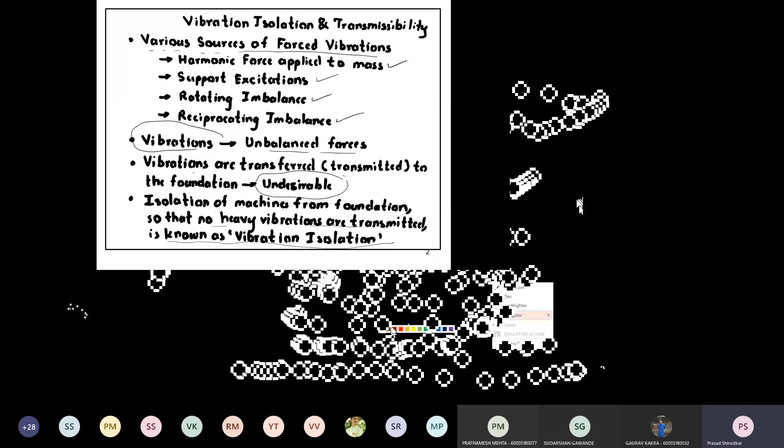Now we will do some mathematical modeling in case of vibration isolation, and this will be a derivative of the section we studied earlier, and here we will be dealing with cases of heavy machinery.

So you have a machine, and it is placed on some foundation. This machine is oscillating due to an external force applied, and the equation for the external applied force is given as F0 sine omega t.

Now the machine is separated from the foundation by means of this structure. This structure is called an isolator.

Now for mathematical modeling, I will create an equivalent model. The same four steps are going to be followed. If I want to create an equivalent model of this system, it will have a mass at the end, that is the mass of the machine.

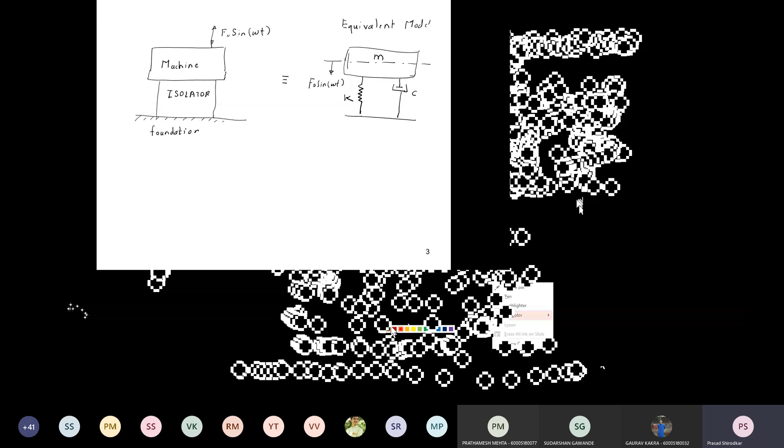To this mass, external force F0 sine omega t is attached, that is mass m, and the isolator provides both properties essential for damping, that is for dissipating energy - spring stiffness K, and some damping properties. So the isolator will have both stiffness and damping.

Now we will draw the equivalent model. So this is basically the mathematical equivalent model. Vibration isolators are placed between the machine and the foundation.

Examples of vibration isolators are rubber, felt, cork, or metallic springs. So these are some examples of isolation.

Now, when we talk about vibration isolation, we also have to define one more term, that is force transmissibility. So we have defined isolation, now we are also going to define force transmissibility. Force transmissibility is defined as a ratio of force transmitted to the foundation to force impressed upon the system.

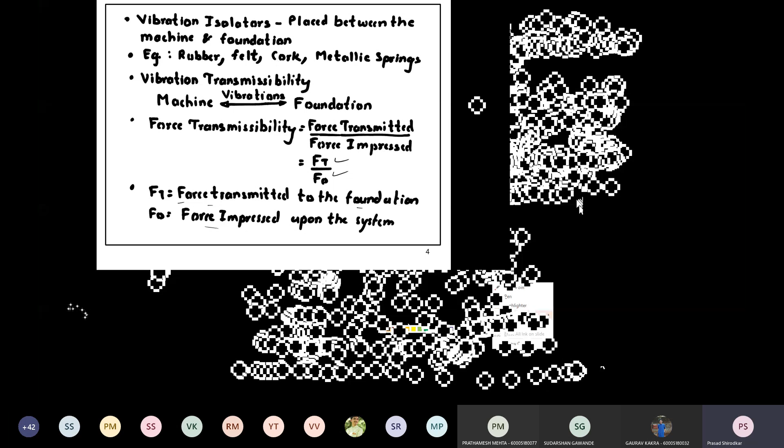So now here we have a machine. To this machine, this external force F0 sine omega t is applied, and if you want to create the equivalent model, you have this F0 sine omega t applied to this mass m, and the isolator will have some stiffness and some damping property.

So the next step after we get this equivalent model is to derive the governing differential equation. To derive the governing differential equation, I'll construct a free body diagram for this mass. This will be mass m, and since the mass is moving down with displacement x, velocity x dot, acceleration x double dot, so you have...

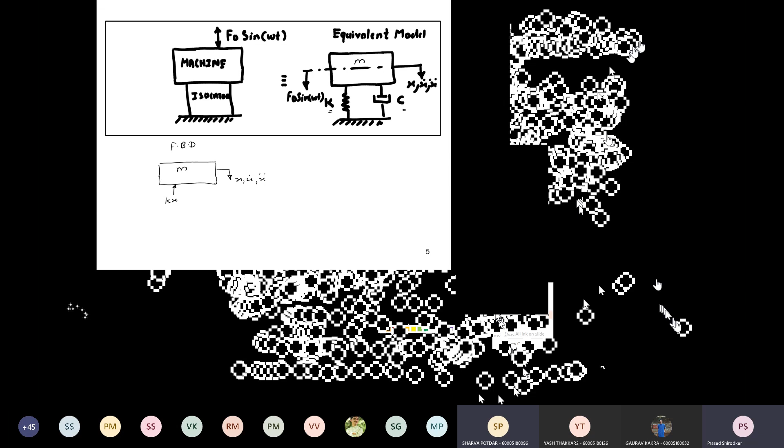Sir, I don't know if it's just me, but the screen isn't fully visible, it's showing different marks of your mouse. Could you reshare the screen? Just a minute. Yes sir, even I am having the same issue. Just a minute. How about now? Yes, fine, completely visible now. Okay, so do I have to recap the things I just described, or can I continue with the slide? Sir, continue, yeah continue.

All right, so construct the free body diagram. The forces are kx, that is the spring force, and damping force cx dot. We have already solved for this kind of system. This is an example of forced vibration, and as I said earlier, this whole topic is a derivative of forced vibration. So the external applied force is F0 sin omega t. For establishing the governing differential equation, I will use D'Alembert's principle. DAP stands for D'Alembert's principle.

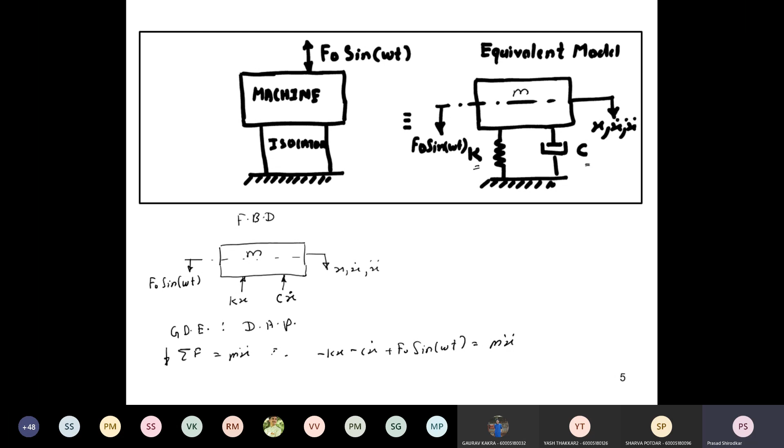So summation F is equal to mx double dot, and downwards is positive, so therefore I get minus kx minus cx dot plus f0 sine omega t equals mx double dot. So this is the equation, or I can rearrange the terms and write it in another form.

mx double dot plus cx dot plus kx is equal to f0 sine omega t. That is our familiar form.

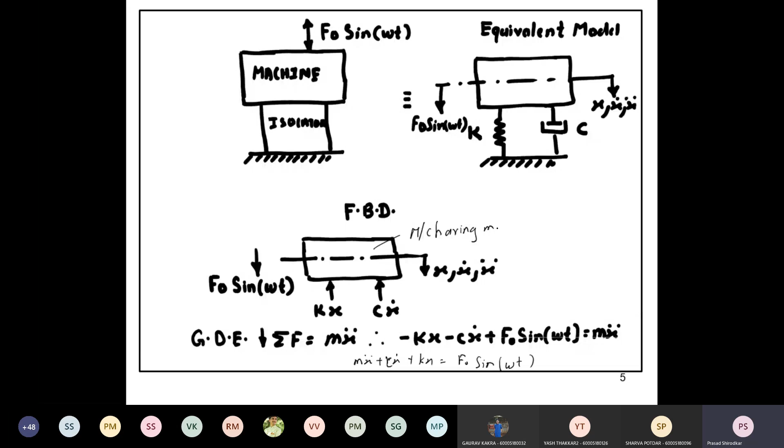So this was the free body diagram for the mass. Now this mass is of this machine, having mass m, and it has forcing frequency omega. So this is the free body diagram for the mass.

Similarly, we'll construct the free body diagram for the foundation. The forces transmitted to the foundation will be equal and opposite to these forces. So kx will act in the downward direction, equal and opposite, and for cx dot it will act downwards as well. So this is the free body diagram of the foundation.

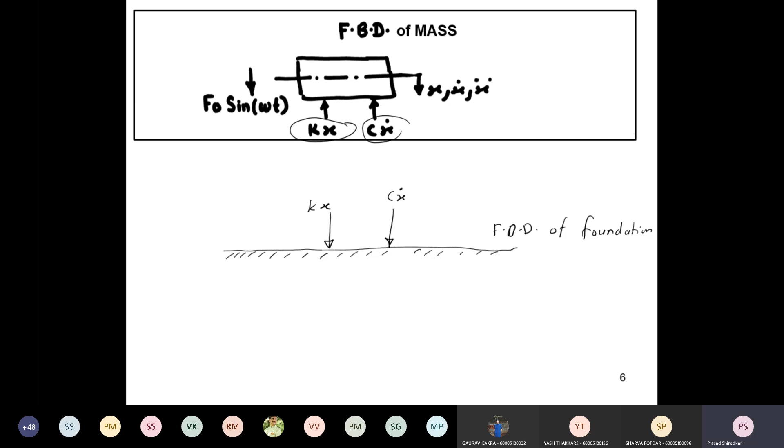Now we have the governing differential equation for the mass: mx double dot plus cx dot plus kx is equal to f0 sine omega t.

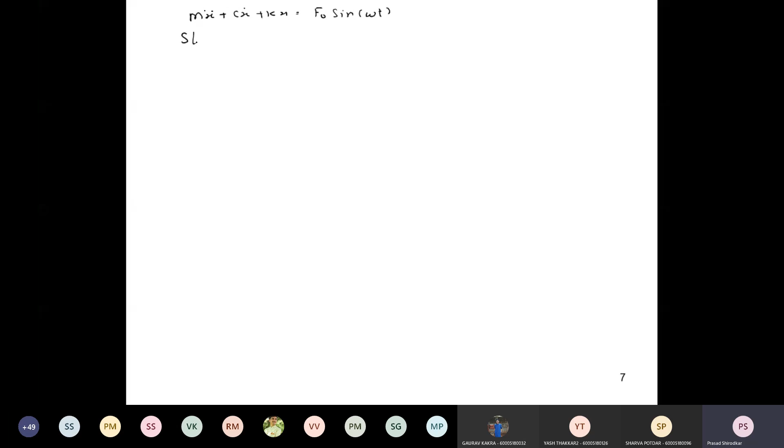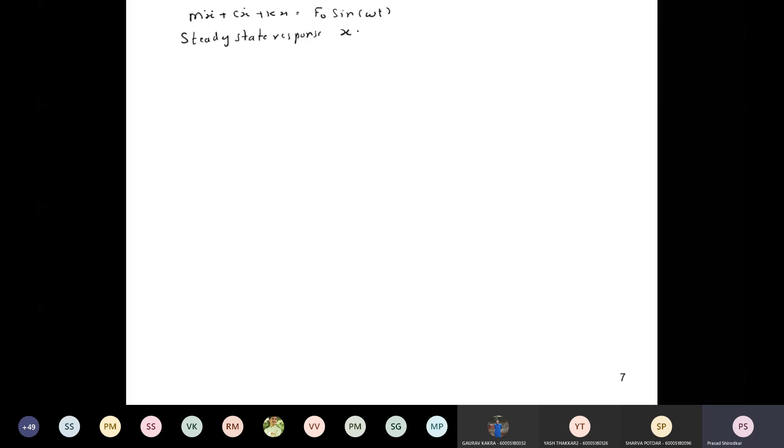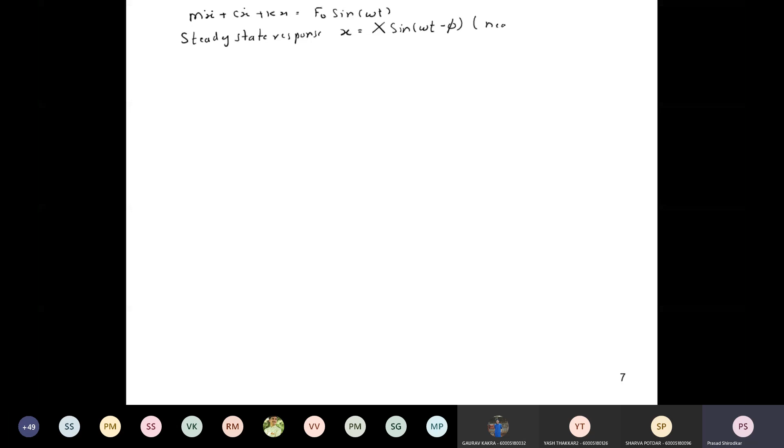So the steady state response will be x of t, or just x, equal to capital X, the amplitude, into sine of omega t minus phi, of course neglecting the transient component, as we have done in earlier cases, since it dies out quickly.

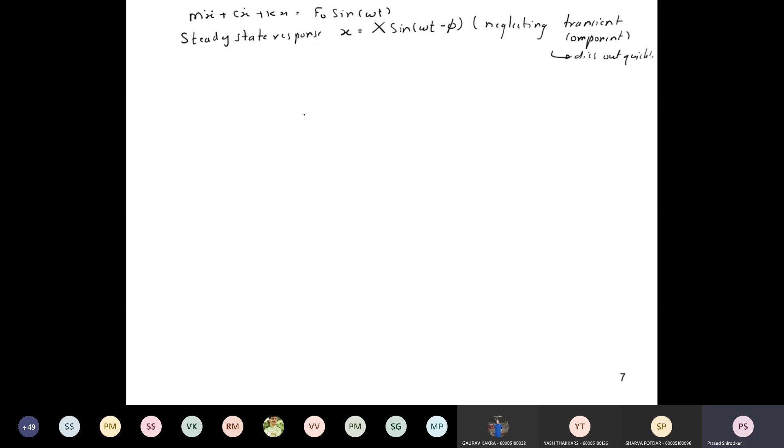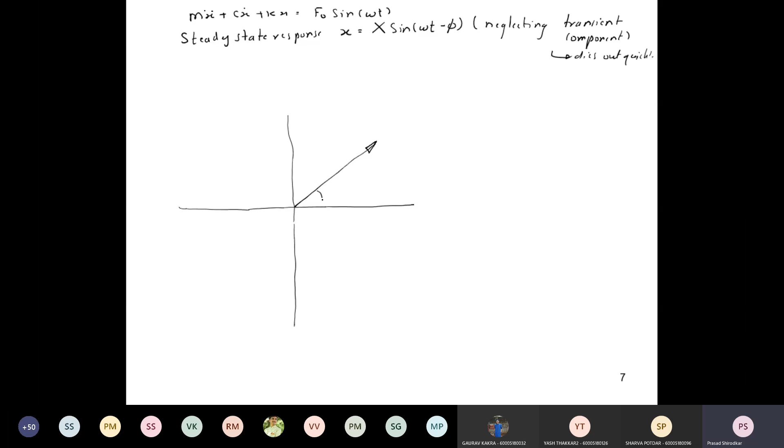Alright, so let's construct the vector diagram, also called the space diagram, for displacement, velocity, acceleration, and the external force. The external force is F0. To construct it, you first draw F0, which is at an angle of omega t from the horizontal.

We have already derived all these things. The displacement vector, the steady state displacement, is given as x equal to X sine of omega t minus phi. So this angle will be omega t minus phi, and this angle obviously is going to be phi.

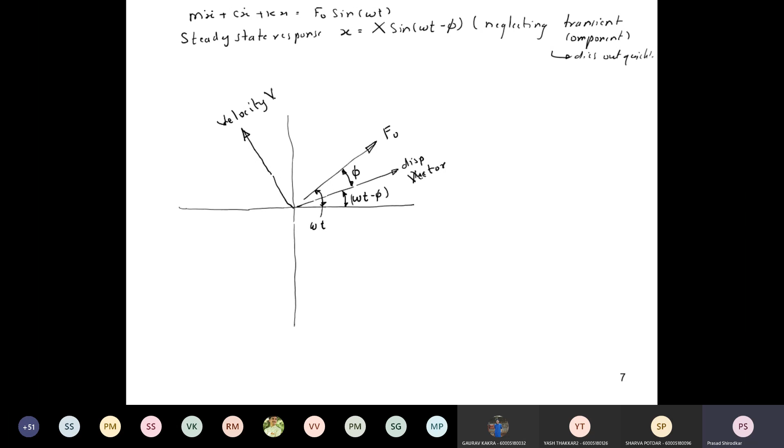So F0 leads the displacement vector by phi. The velocity vector will be perpendicular to the displacement vector, as we have discussed earlier, and the acceleration vector will be diametrically opposite to the displacement vector.

Now using this we will mark all the various forces. So draw an x-axis and y-axis. Any questions, ask immediately. So F0, draw it parallel to F0.

Then m omega square x, diametrically opposite to the acceleration vector. c omega x in exactly the opposite direction to the velocity vector, and spring force kx exactly opposite to the displacement vector. I hope you are able to recall all these things.

This is called the spring force, damping force, and inertia force. And this is the excitation force.

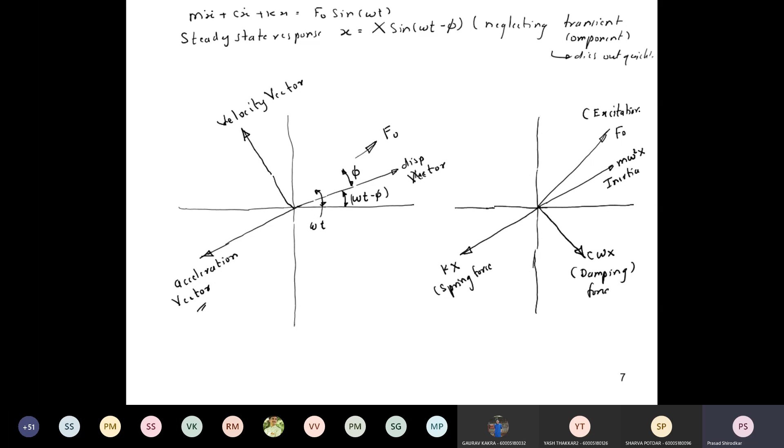Okay, now the space diagram is constructed. Any questions so far? Alright, so the force diagram, the space diagram, is constructed.

Now from this space diagram, we will construct the force polygon. You arrange the vectors one in front of the other so that we can get the resultant. So I have arranged all the vectors, starting with f0, then m omega square x, followed by c omega x and kx.

And since this is in equilibrium, this will be a closed polygon. So all these vectors are basically parallel to these vectors.

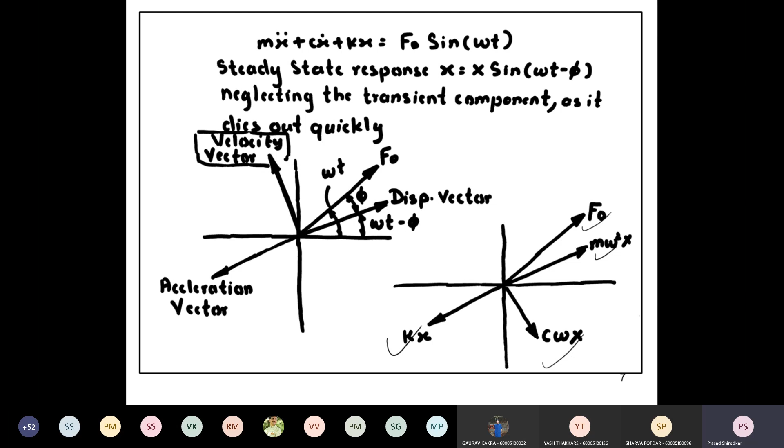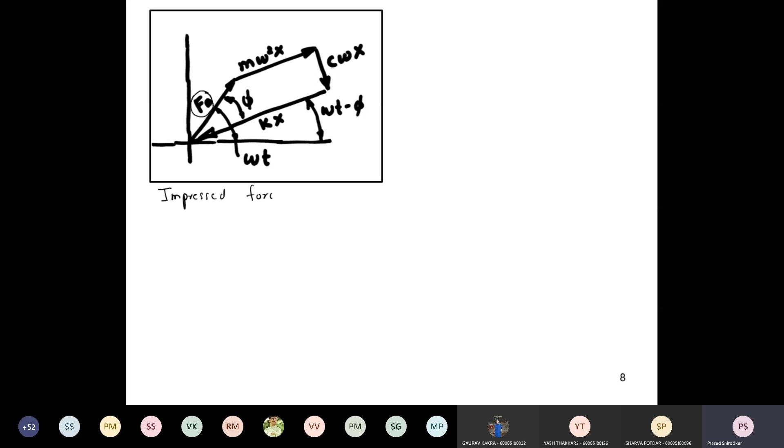Now, in addition to this, so this is the space diagram, these are all impressed forces. Now, using this, we will construct the force polygon for the transmitted forces.

So if you recall the free body diagram, these are all transmitted forces, and they are equal in magnitude and opposite in direction to the impressed forces.

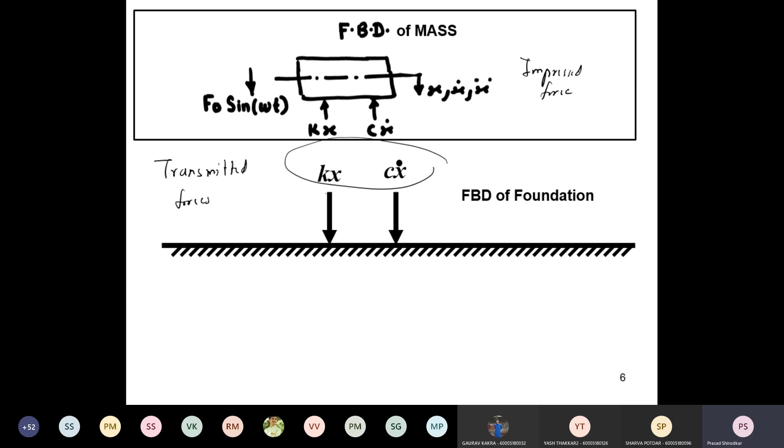So we are going to construct the vector diagram in the same manner, at an angle of omega t minus phi, but in opposite direction will be your kx. I am constructing a vector parallel to this vector, but in opposite direction, with the same length. Now c omega x is downward, so here it will be upwards.

So this is the spring force kx, and this is c omega x. The resultant of these two is the transmitted force Ft. And we'll also construct F0, this one, as a reference.

Alright, so this is your F0, and here this will be the angle phi, and this small angle will be alpha.

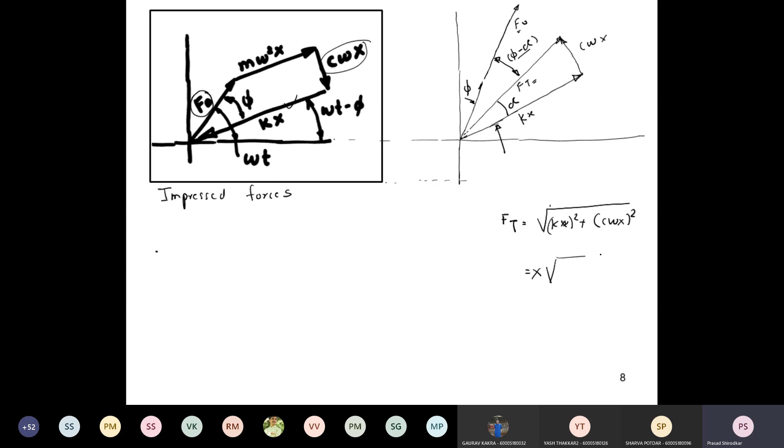Alright, so let's write the resultant of this. So Ft, force transmitted, Ft will be equal to square root of kx square plus c omega x whole square, and that is equal to x into square root of k square plus c square omega square. Sir, how does F naught make an angle phi with vertical?

Not vertical. This is the angle. This angle. It is the inside angle. Okay sir, okay.

Alright, so x is equal to Ft divided by square root of k square plus c square omega square.

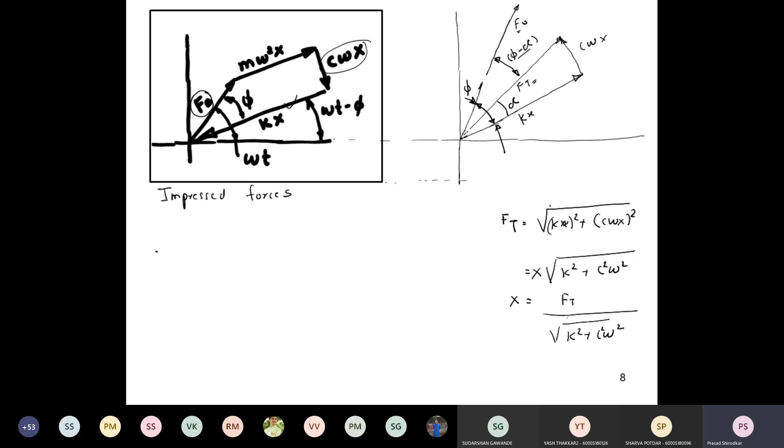So here x is what? Your steady state amplitude of mass, and we have already derived the expression for the steady state amplitude of the mass. So steady state amplitude will be given as x is equal to F0 by k divided by square root of 1 minus r square whole square plus 2 zeta r whole square.

Alright, so Ft divided by square root of k square plus c square omega square is equal to F0 by k divided by square root of 1 minus r square whole square plus 2 zeta r whole square.

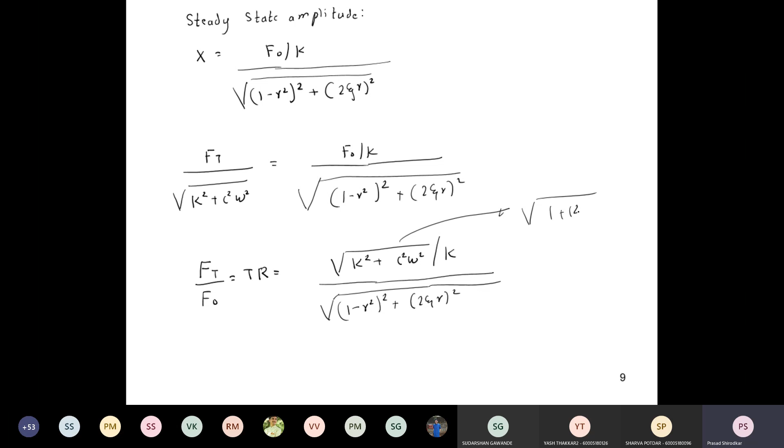And this I can reduce to the form of square root of 1 plus 2 zeta r whole square, and so my transmissibility ratio TR is square root of 1 plus 2 zeta r whole square divided by 1 minus r square whole square plus 2 zeta r whole square.

Okay, so if you recall the earlier equations, this is similar to the equation of support excitation for absolute amplitude ratio. Any questions?

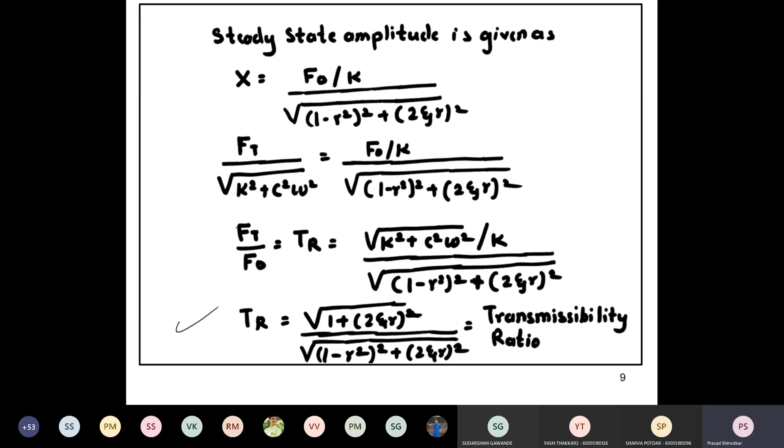Alright, now I already described in the slide, Ft lags F0 by this angle. Alright, and that angle is how much? That is phi minus alpha.

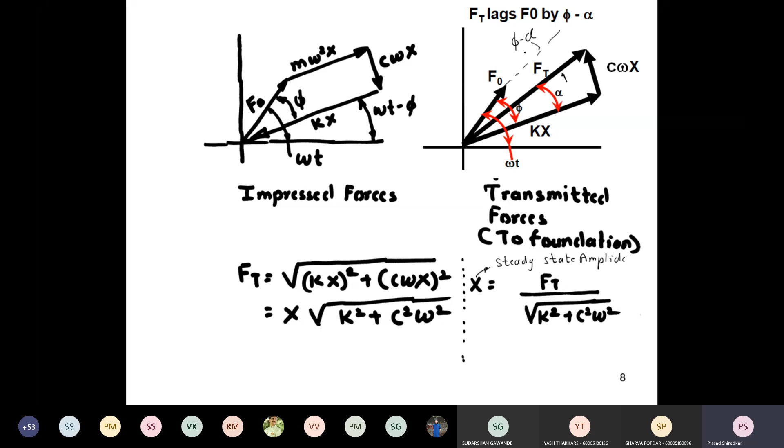Okay, so Ft lags F0 by phi minus alpha. Alright, so phase lag is phi minus alpha, and that is equal to tan inverse of 2 zeta r upon 1 minus r square, minus tan inverse of 2 zeta r.

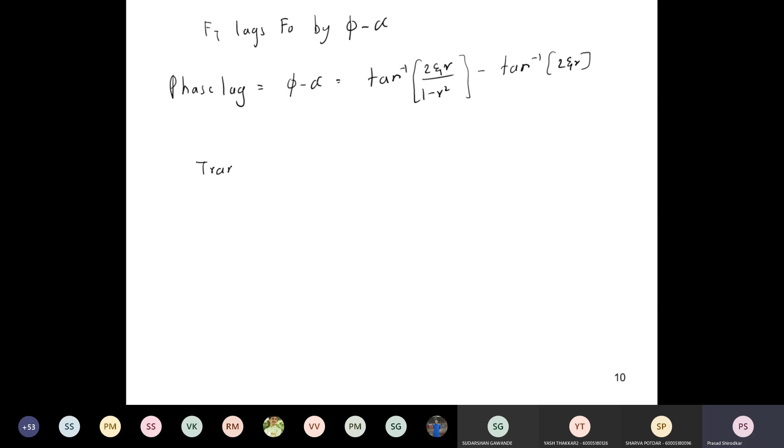Alright, so we have derived the equations. Now we will see some of the features of this transmissibility ratio versus frequency ratio. Okay, and we'll discuss the features one by one, and then at the end of it we'll draw the graphs. Okay? And then we'll have the quiz on the graph.

Okay, so transmissibility ratio will be square root of 1 plus 2 zeta r whole square divided by square root of 1 minus r square whole square plus 2 zeta r whole square.

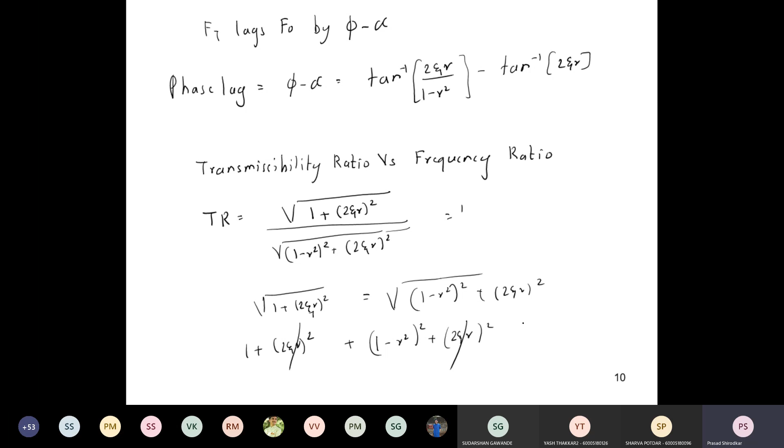Alright, so suppose if this is equal to 1, alright, and I equate both the sides, 1 plus 2 zeta r whole square is equal to square root of 1 minus r square whole square plus 2 zeta r whole square. Okay, and I take the square, so this becomes 1 plus 2 zeta r whole square plus 1 minus r square whole square plus 2 zeta r whole square. Alright, so 2 zeta r whole square, 2 zeta r cancelled, so this becomes 1 minus r square is equal to 1.

Alright, so if I take a square root of this, I get 1 minus r square is equal to plus or minus 1, or r is equal to 0 or root 2.

Alright, okay, so if you see, the equation for transmissibility ratio is 1 plus 2 zeta r whole square and square root of 1 minus r square whole square plus 2 zeta r whole square. Okay, so when r is equal to 0, that is at the beginning, TR will be 1.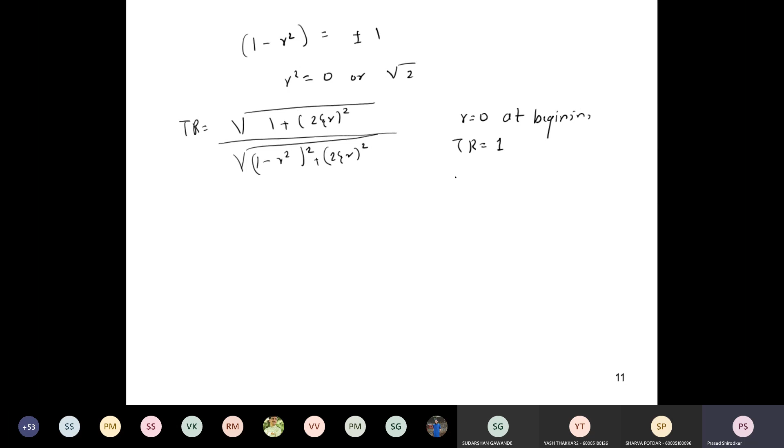Alright, so all curves will start from point r is equal to 0 and TR is equal to 1.

Alright, so all the curves are going to start from this point, and also if you see, this is equal, we have earlier equated this equal to 1. So all the curves are going to pass through r is equal to 0 and r is equal to root 2. Alright, so this is one of the key important features we have to keep in mind when we construct the graphs. Alright.

Now, second point, at resonance r is equal to 1. So transmissibility ratio reduces to the form of 1 upon 2 zeta. So now if I make damping equal to 0, the transmissibility will go to infinity. That is an undamped system.

So transmissibility, I can write it as square root of 1 plus 2 zeta r whole square divided by r square upon square root of 1 upon r square minus 1 whole square plus 4 zeta square divided by r square.

Now we'll see the key features using this equation. So when r tends to infinity, transmissibility tends to 0. So if you are operating at higher frequency ratio, then the transmissibility will be less.

You can observe this phenomena when you are using a machine, as the machine is operating at a very high speed, the machine starts to operate very smoothly. Then you will find that the vibrations of the machines are very less when the speed is very high.

Now, for r less than root 2, you can see the transmissibility curve. So TR will be always greater than 1. This implies force transmitted will be greater than force impressed, always

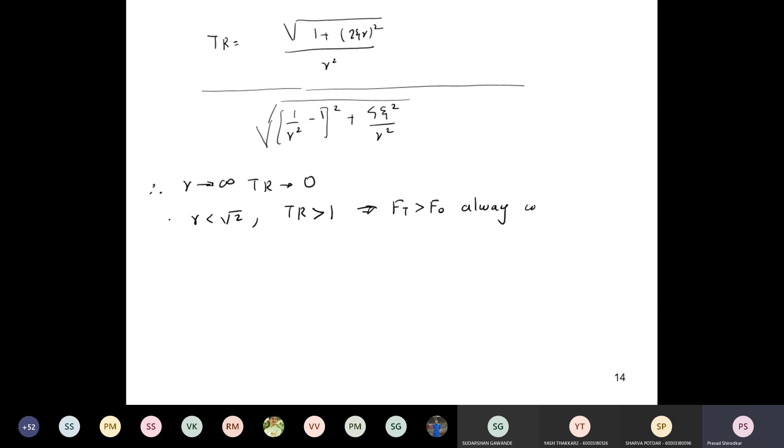when R is less than root 2. So you can decrease Ft by increasing zeta. Now for R greater than root 2,

you will find that the transmissibility ratio is always less than 1. So this implies Ft is less than F0 always when R is greater than root 2.

So the force transmitted decreases as the damping decreases in this region. Sir, yes, in this second case, Ft will be less than F0 when R is greater. So in this region, low damping is preferred. Ft should be less than F0 - I have made that correction.

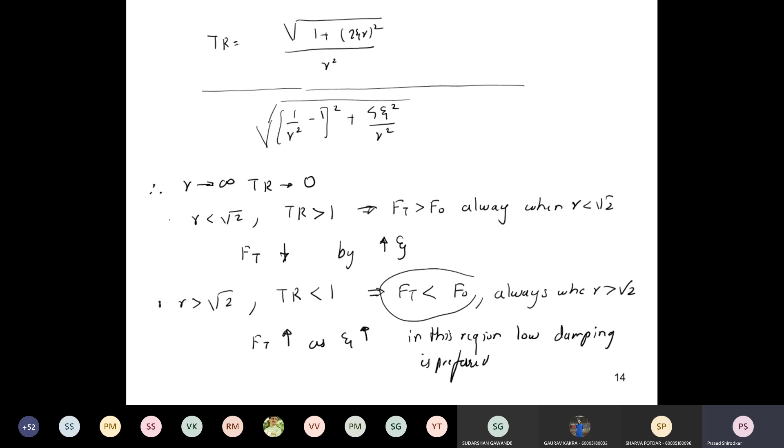So these are just the points which we just discussed. Now we have discussed all the points, and now we will construct the curve. Any questions before we move on?

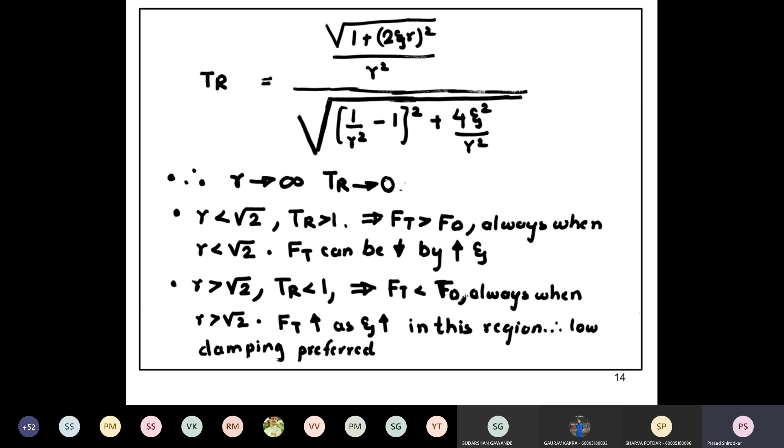All right, so let's now construct the curve for this. This is the third set of curves you are constructing. We constructed for magnification factor, constructed for phase angle versus frequency ratio, and dimensionless amplitude versus frequency ratio. Now this is for the transmissibility ratio versus frequency ratio.

So frequency ratio on x-axis, transmissibility on y-axis, and I am going to mark the two most important points. So let me first mark the scale: 1, 2, 3, and 4 - four points I am marking, and then again here 1, 2, and then 3.

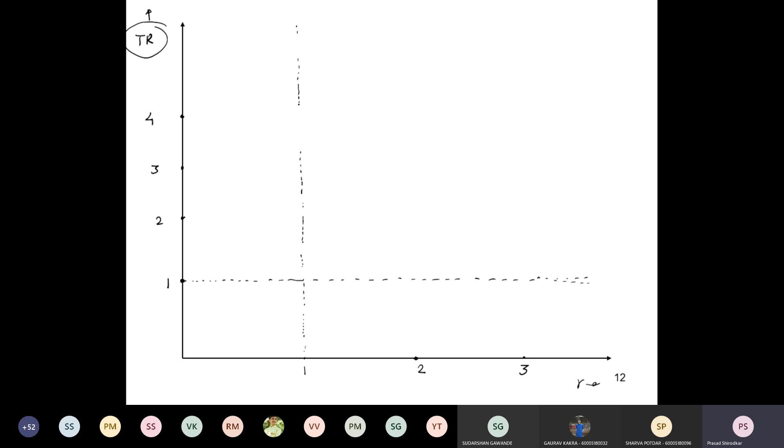This is an important reference line you need. Then for r equal to 1, draw a vertical line - that corresponds to resonance. In all earlier graphs these were our two reference lines, but for this case we have derived something, so we'll need one more line. This one here is at root 2.

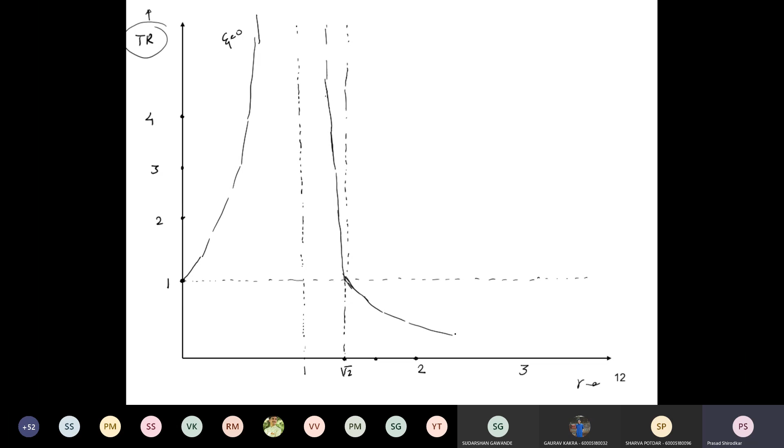Now when r is equal to 1 and zeta is equal to 0, this curve goes to infinity. This is the first reference curve, for when zeta is equal to 0. And on the other side, all curves have to pass through 1 and root 2. So this is the second curve, and this will also go to infinity, for zeta equal to 0.

Now the next curve, again for a higher value of zeta. As you can see, from 0 to root 2 frequency ratio, as zeta increases the transmissibility decreases. But from root 2 onwards, when zeta increases, the transmissibility is in fact increasing. So from 0 to root 2 you require higher damping, and from root 2 onwards you require lower damping.

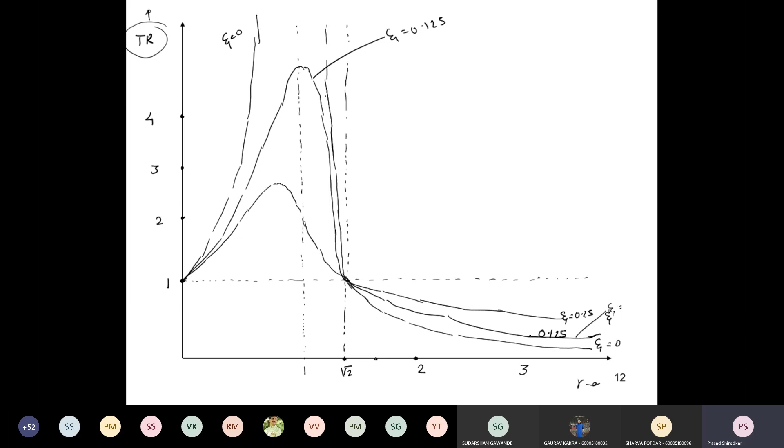Zeta is equal to 0.25, this is 0.125, this is 0, and so on and so forth. Any questions so far?

Now when you plot this numerical value, you will observe that the curves are shifting to the left - the peaks of the curves are shifting to the left. We are not going to discuss the peaks, because this is not really the operating zone of our machines, but all machines have to go through this zone.

Whenever you start a machine, it will not immediately reach rated speed. If the motor has a rated speed of 1000 rpm, you cannot start the motor at 1000 rpm - if you do, the motor will burst. If you're starting your ceiling fan, when you switch it on it doesn't immediately start at maximum speed; the speed increases gradually. So each machine goes through a range of speeds.

If you see this curve, when zeta is equal to 0, as you go on increasing the speed, the transmissibility goes to a very low value. So ideally you'd prefer zeta to be 0. But the system, when starting, is also going to pass through the frequency ratio r equal to 1, so somewhere in between it goes through this resonance phase. If zeta is kept as 0, the machine will vibrate at very high amplitude at resonance. So it's always preferred to give some amount of damping to the system.

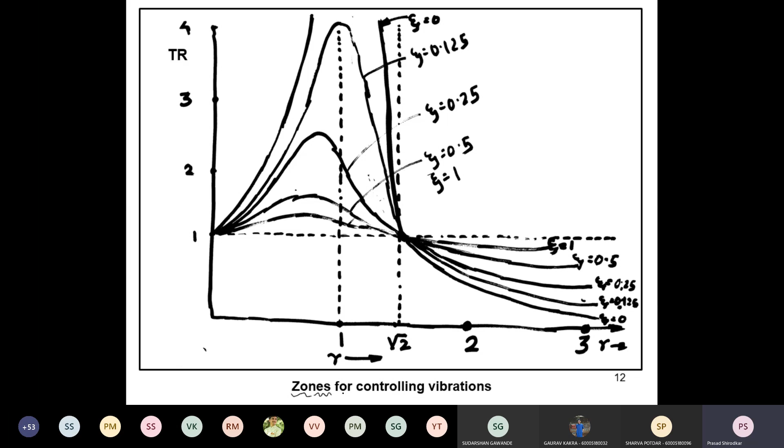We'll identify various zones - when the system is operating in a particular zone, what should be the criteria for controlling and reducing transmissibility? First, we've already discussed: for low transmissibility, frequency ratio should be greater than root 2. As you can see, past root 2 the transmissibility goes on decreasing.

Ideally zeta should be close to 0, but as the system goes through resonance, transmissibility will go to infinity when r is equal to 1. So zeta is always kept greater than 0 - a small amount of damping is always provided.

So when r is small, next point: when r is small, before resonance - let's pick a very small region somewhere over here, when r is a very small value and the curves are not starting to peak out. This is not a clearly marked value, but it can be determined by experience based on studying the system.

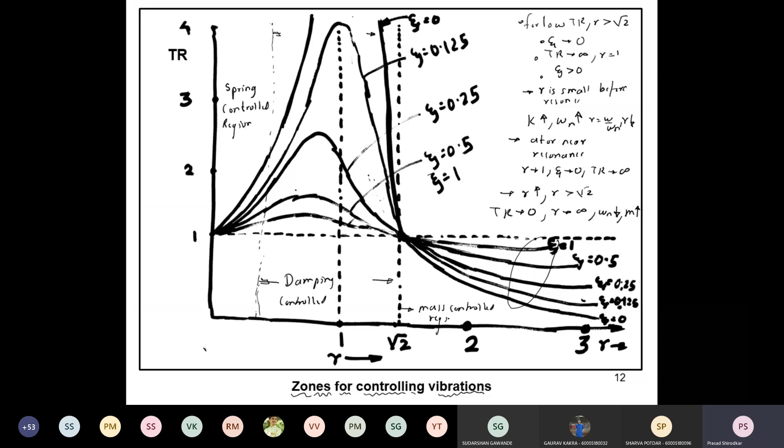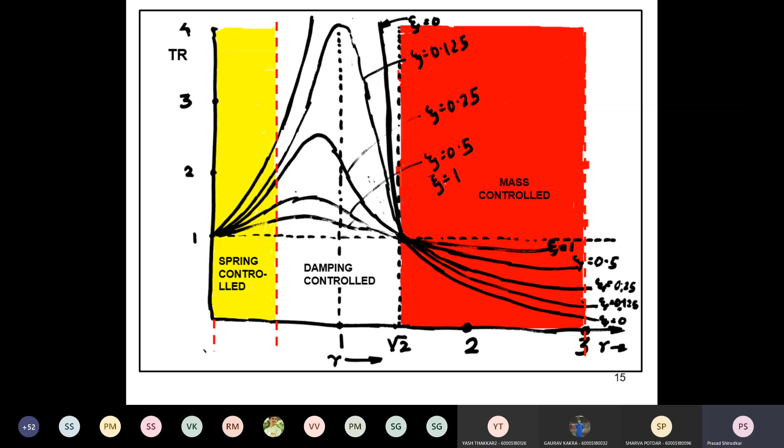These are the three regions which we just discussed. Any questions before we go to the quiz? All right, done, everybody is clear.